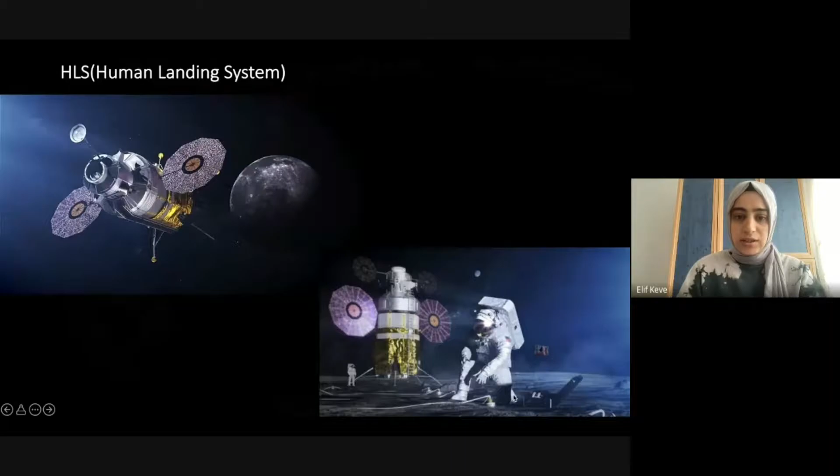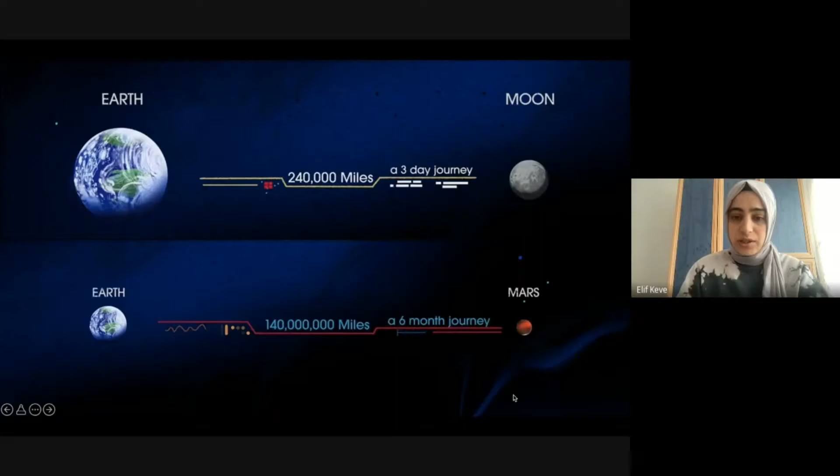We talked about all the details regarding Moon and Mars, the problems and the solutions, and the solutions which can be made by space architects, as well as the technologies which will carry us to the Moon and Mars. I will give more details after this about Mars. I want to recall the distance again, because it's crucial to realize how serious the mission to Mars is, which takes a long journey.

The technology I will talk about, made for Mars, is MOXIE. For that, I first want to show the differences between the atmosphere of Mars and Earth. As you see here, we can see methane gases which are available on both Mars and Earth, but the percentage is extremely different.

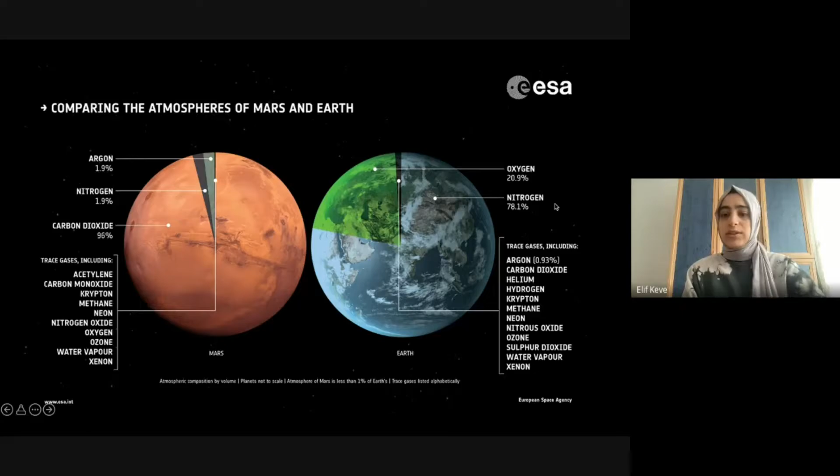As you can see, on Earth we don't have fully oxygen - the high percentage is nitrogen, and oxygen is only 20%. Carbon dioxide on Earth is among the trace gases, and there are also a lot of different trace gases included in the breath we are taking.

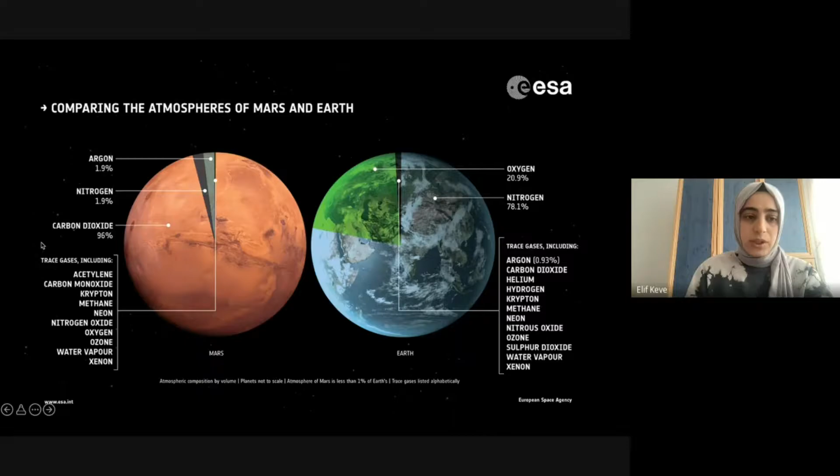When we look at Mars, the highest percentage is carbon dioxide, and there is also nitrogen, but in a smaller proportion. Argon is very similar to Earth. So the MOXIE project is about converting the carbon dioxide percentage to oxygen.

You know about the Perseverance rover that was sent to Mars in 2020 and landed in 2021. It traveled to Mars to investigate the ground with all the materials and research about the deep of the planet, to research the existing ice and water.

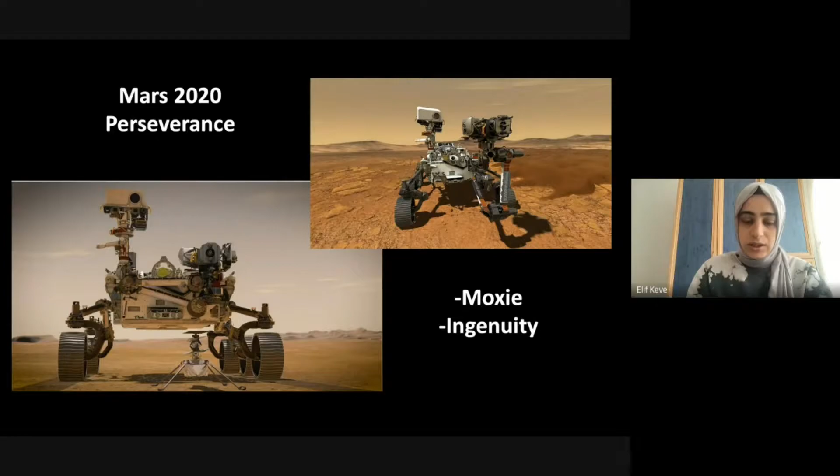With this rover, there are two important parts. One is Ingenuity, which is the first flight on Mars, and the second is MOXIE that we will talk about now. MOXIE is the one that will work like a tree on Mars, but at this first landing with MOXIE and Ingenuity, the MOXIE size is extremely small, because it's kind of a test of this machine, to see if it works or not. So what is MOXIE actually?

MOXIE is an abbreviation of Mars Oxygen ISRU Experiment. ISRU is In Situ Resource Utilization. So it's made from these words, and in dictionary description it means the ability to face difficulty with spirit and courage. MOXIE is a short, snappy name for a tool that helps lead to a human footprint on Mars. It helps humans explore Mars by making oxygen. It works in situ, in place on the red planet, and is an experiment.

The project owner is Michael Hecht, and he says that human exploration of Mars will be a seminal event for the next generation, the same way the moon landing mission was for his generation. They also think about the benefit of MOXIE, as whenever the first NASA astronauts arrive on Mars, they will likely have MIT to thank for the oxygen they breathe and for the oxygen needed to burn rocket fuel that will launch them back home to Earth.

So as we can see, MOXIE is not only for producing oxygen for humans to breathe, but it's also a crucial point that will help rocket fuel to be burned to come back to Earth, because as you know, rockets will not be able to burn without oxygen.

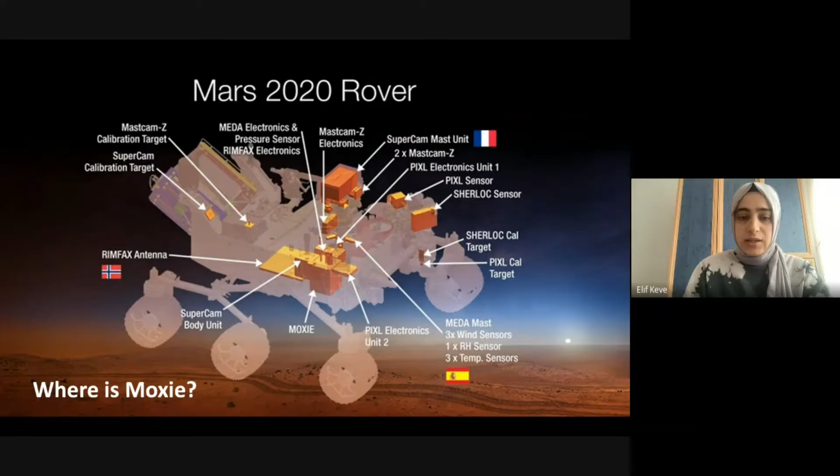When we check the pieces inside the Perseverance rover, where is MOXIE placed in it? All the pieces are actually not designed by only one country, but it's a multi-country effort, as you can see with the flags here showing what each worked on. We can see here that MOXIE is in the middle of the rover. I want to open up the detail of the mission and how it works, what kind of parts are included in it.

What are other duties of MOXIE? MOXIE is the smallest scale actually for now. It will be designed bigger for the next missions, and it will make more benefit on Mars. It is ingesting carbon dioxide from the atmosphere and producing propellant-grade oxygen. MOXIE will make 6-10 grams of oxygen per hour, like a smallish tree, or about 50% of what you breathe.

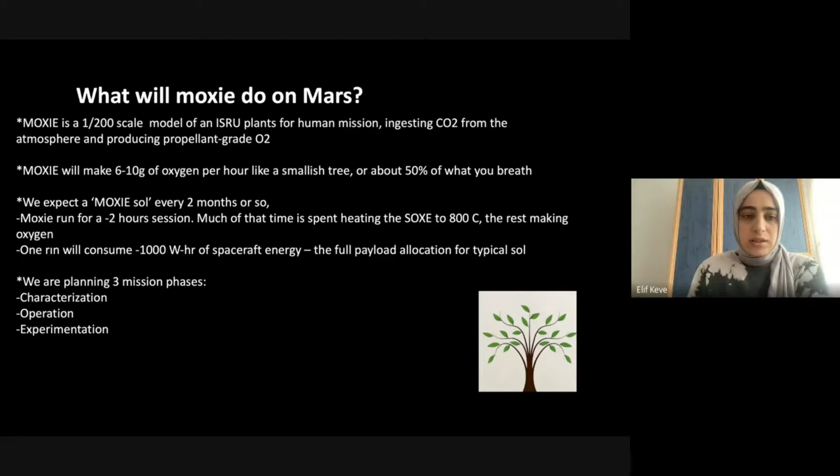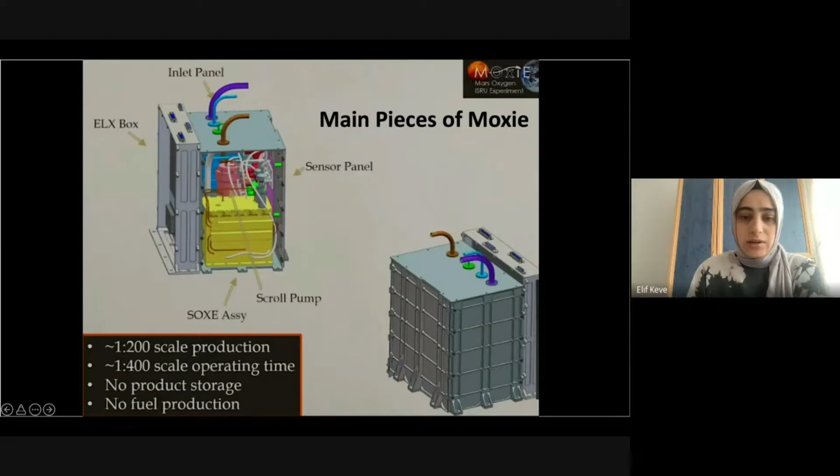When we look into this machine, there are two very important parts that I will give detail about: SOXE and the scroll pump, located in the sensor panel. As you can see here, this yellow box is SOXE, which is the entirety of it. And the pinkish color here is the scroll pump that is taking air from outside to inside for changing it.

At the exterior view, it is placed inside with two inputs for the outcome, and this part is taking in the breath, the air inside. The scroll pump is placed here, and they are placed next to each other.

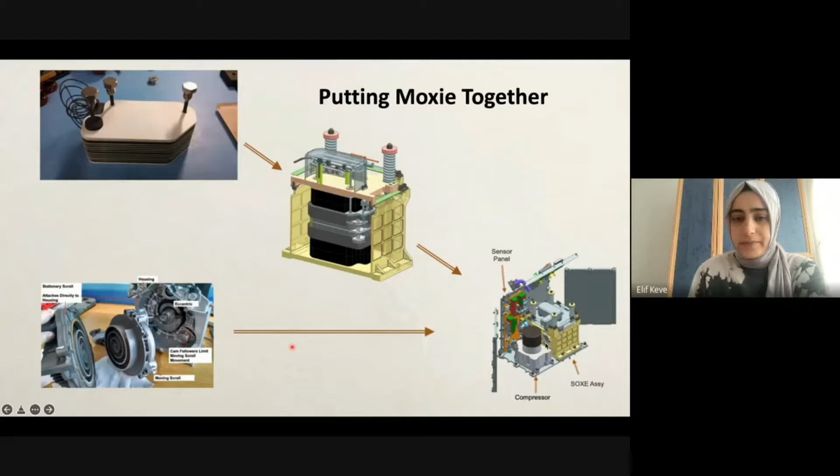From this chart, maybe it's easier to understand how it works inside with the chemical descriptions. This is the scroll pump, placed next to the SOXE, and it's sucking air from outside and taking it inside to send to the SOXE. The actual work happens in the SOXE.

It works with the same system that we learn from chemistry. It has two different sides, the cathode and anode, to divide the minus and plus molecules. As you can see here, there are three pipes which take in the air, dividing it with this system, and taking out the oxygen and carbon monoxide and carbon dioxide.

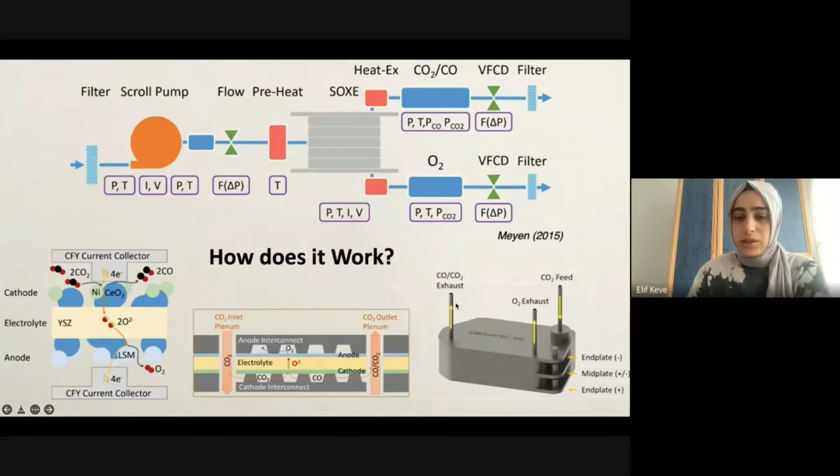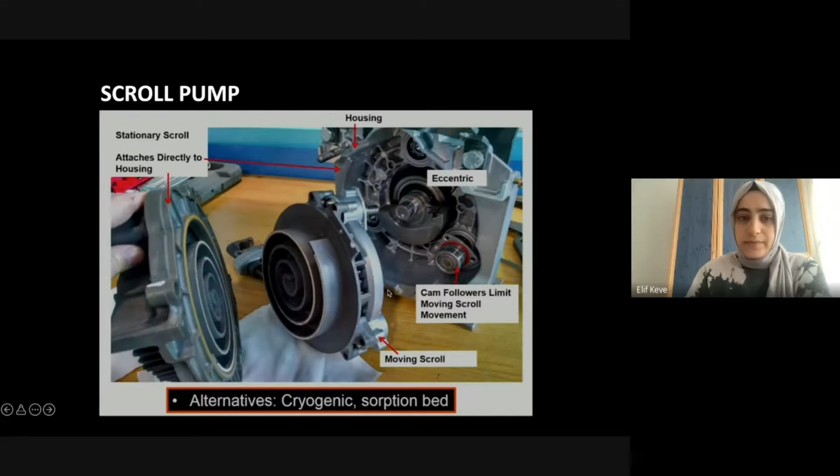Maybe this is the simplest way to show how it works. So how does SOXE take the air in? There is a housing part here holding this, and a part that moves, a moving scroll, to take the air inside. This is the simplest way the carbon dioxide in the air is taken inside to be divided into carbon monoxide and oxygen.

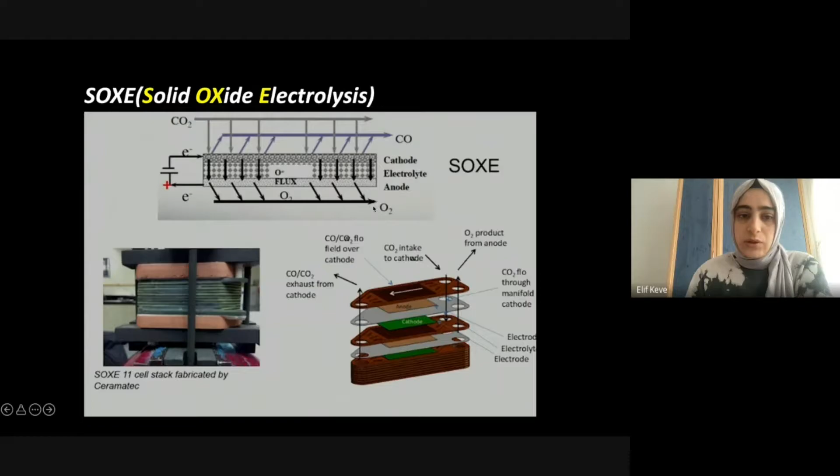And the simplest reaction is shown here. However, if it works like this, the benefit is usually half, because of the chemical reaction. When you take carbon dioxide, it will produce half the benefit in oxygen, unfortunately.

The next project is the same project, but the size of it is extremely different scaled. So the benefit given by the Mars 2020 project will be a kind of demo of the real size of the MOXIE. With this new scaled MOXIE, we are going to get more benefit, like a small forest rather than a tree.

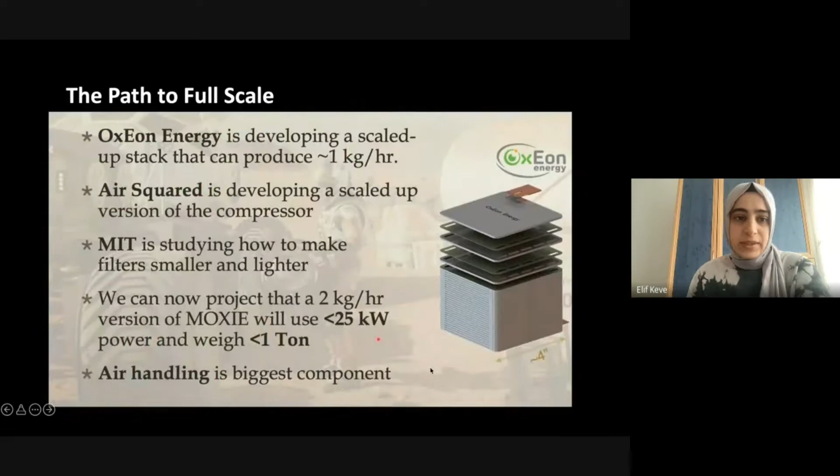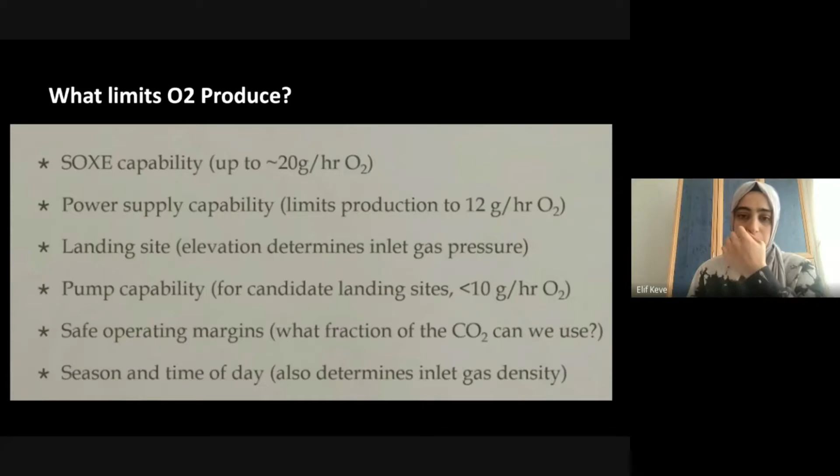There are some limits to oxygen production, because it's not possible to use all the energy of the machine fully for oxygen production. There are also inner piece capabilities. SOXE capability is up to 20 grams per hour it can produce oxygen.

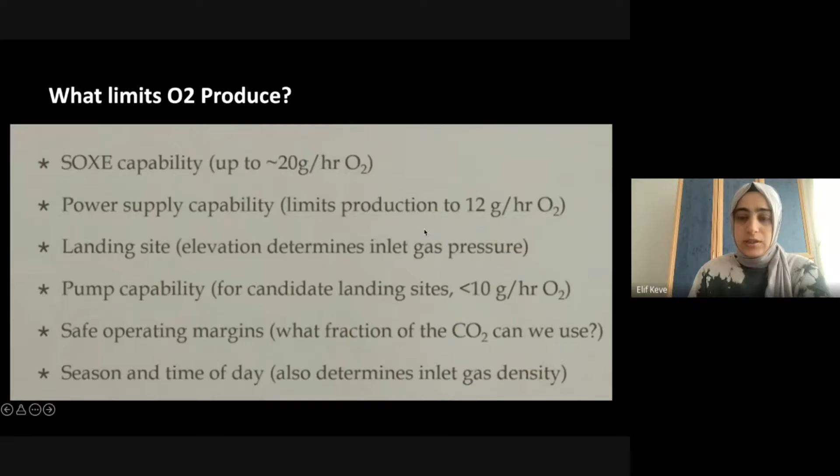Power supply capability is also one of the different factors inside. And here it explains the differences in time, because the machine works differently in the summer nights and summer mornings, according to different seasons or temperatures.

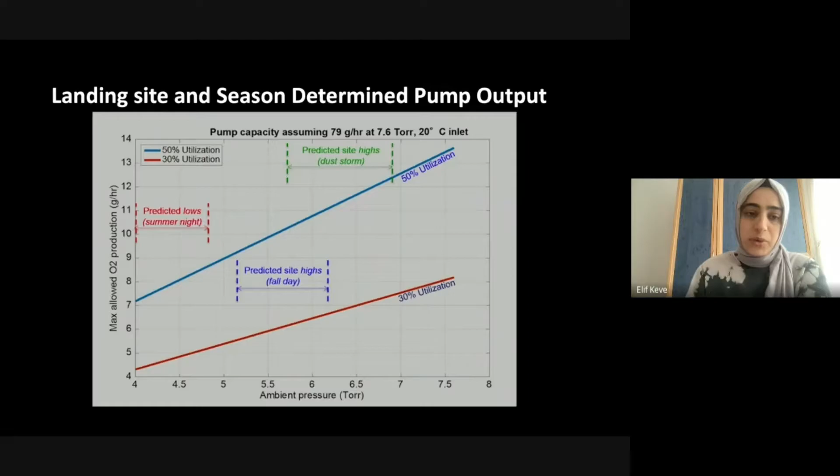As I said, all the energy produced by the machine is not fully used for producing oxygen. It loses a lot of power for the machine's own workings, and the highest one is the stack heaters, which take 72, and electronics conversion is 67, and SOXE also uses high power, and the pump as well.

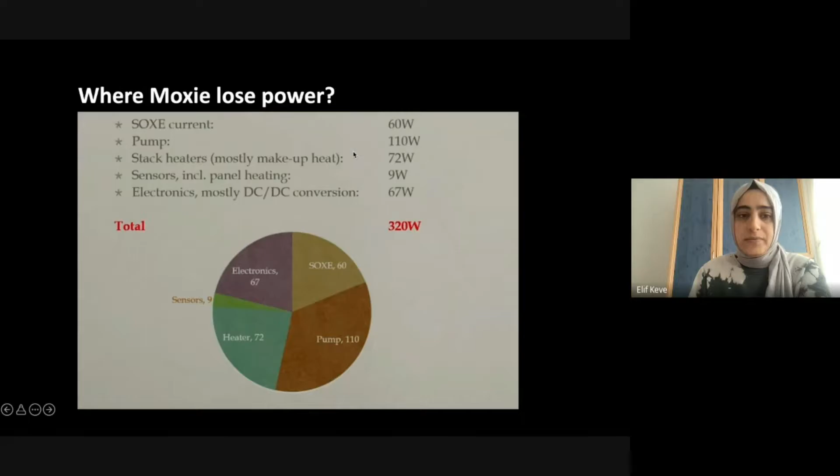I would like to give some examples of space architecture projects after this. So we are learning how we will go to the moon first with the Artemis project, to make the first and highest analog area to simulate life in outer space. Then after Artemis 2, we will land on Mars, and what we have to solve is oxygen, to return and to breathe.

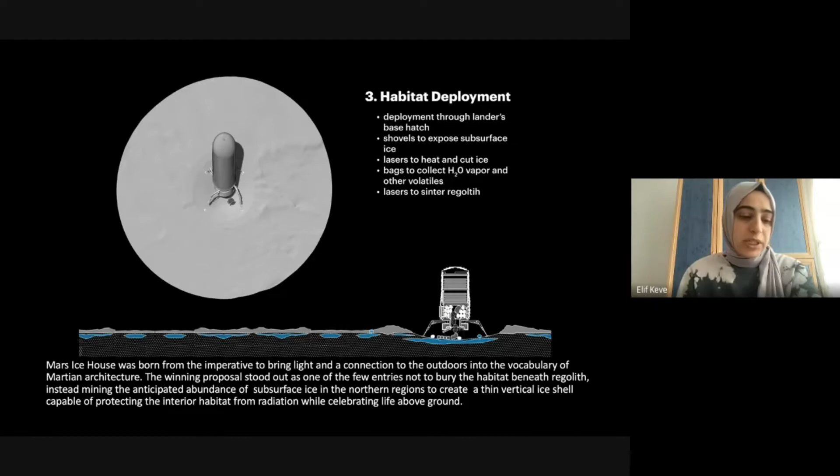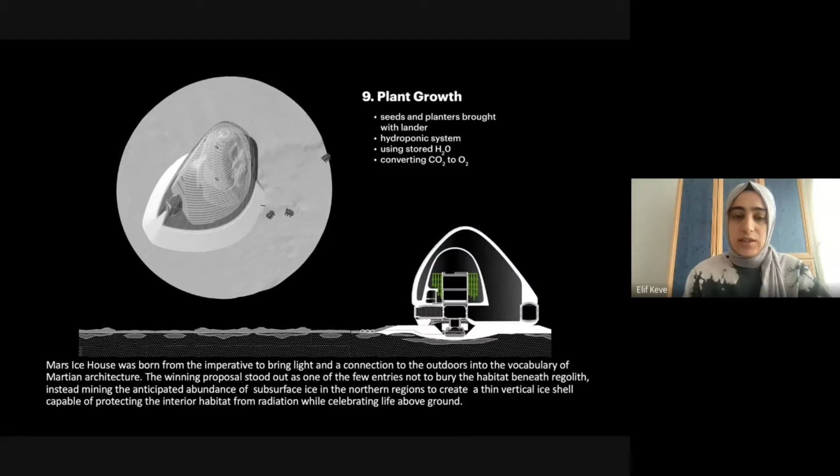As you can see in this small demo and animation, first there will be a descent and landing to the ground, and the habitat will be deployed. Then, as for the shell, the exterior shell and interior shell are made of ice and ETFE translucent material, and it should find...

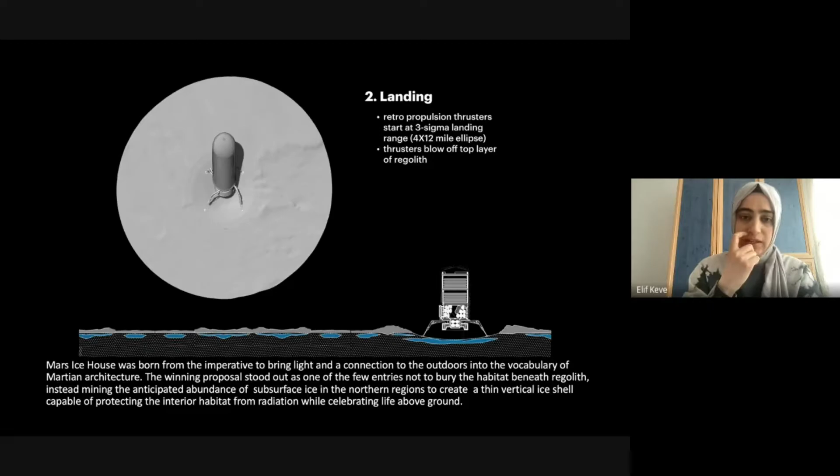...the H2O, which is water, ice, under the ground. There are different machines working on the construction of this building. One of them is very important for finding ice and water underground. I will give more details about these machine robots, how they work and what they do.

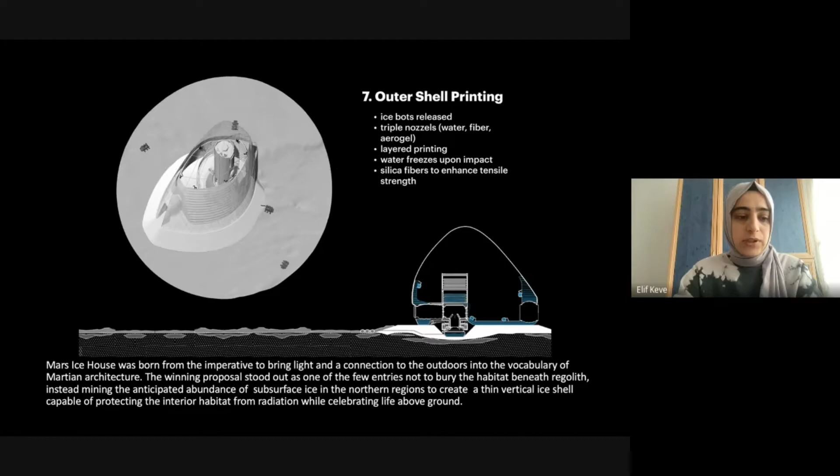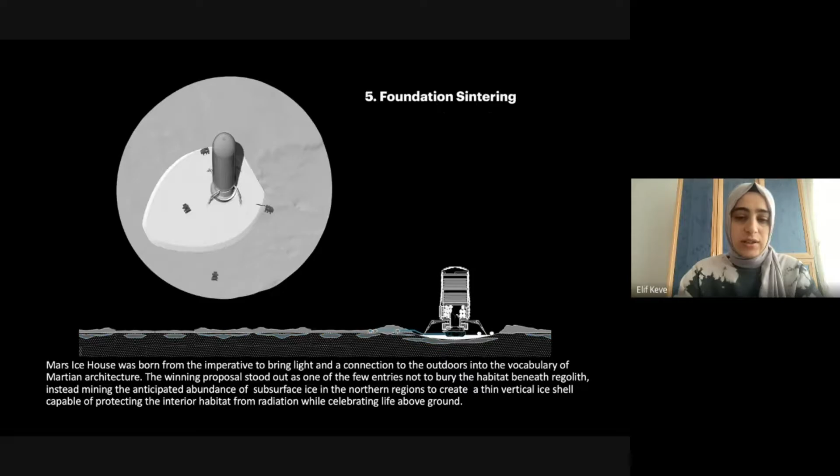Finally, after having the source of ice and water, the foundation will be sintered, and ETFE membranes will be inflated. The second important robot is for printing the shell, both the outer shell and inner shell.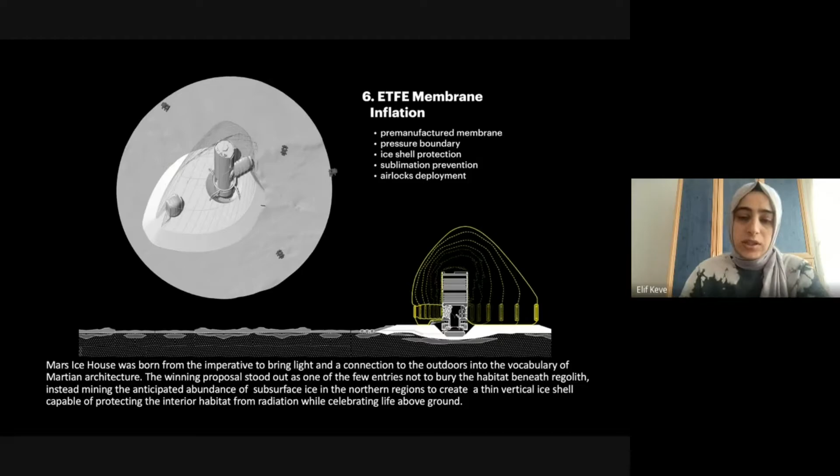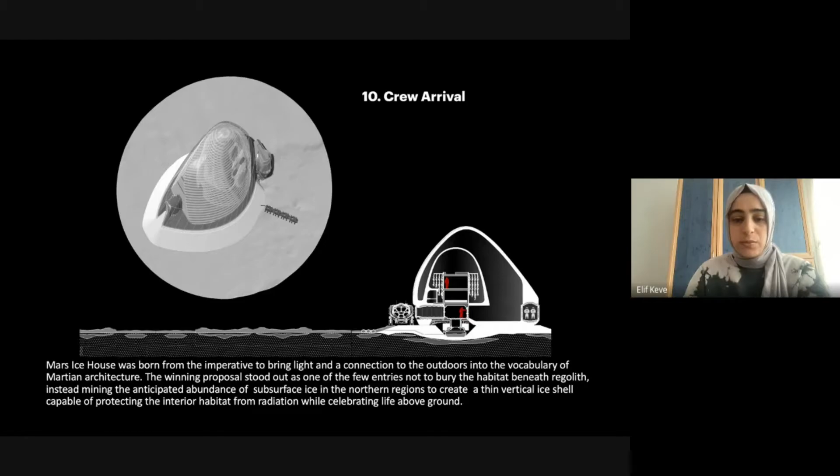I also want to make a last point here. The concept of this project comes from bringing fresh light from outside to inside - that's why the material is translucent, partially transparent, to let sunlight inside. The machine robotics I talked about are these two very important ones, WaSiBo and iBo.

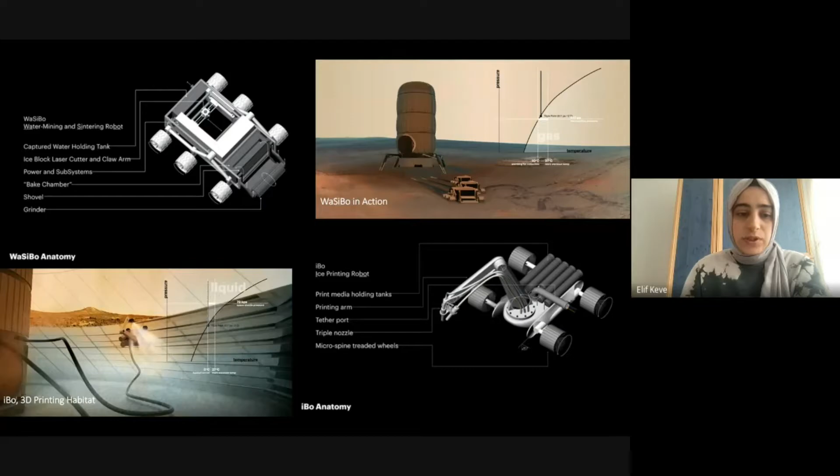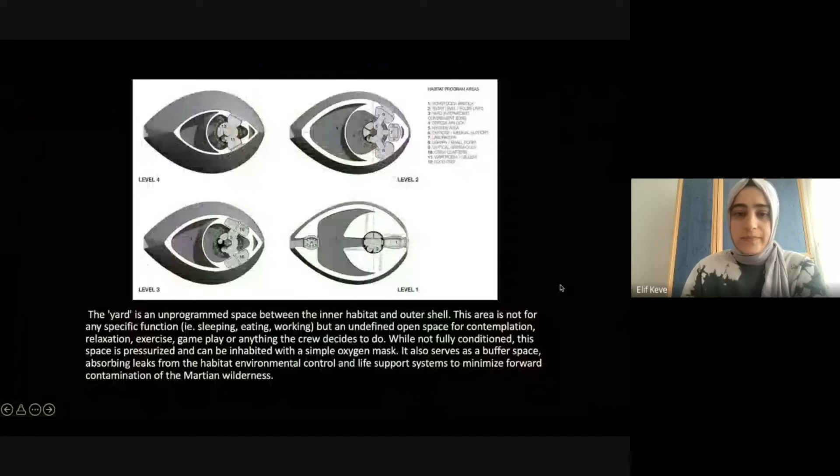WaSiBo is the machine that will research the places with water and ice to be used in the construction of this first habitat. iBo is the 3D printing machine used for the exterior and interior. Here you can see better how it works, climbing and 3D printing for the interior and exterior, because this project is double shielded.

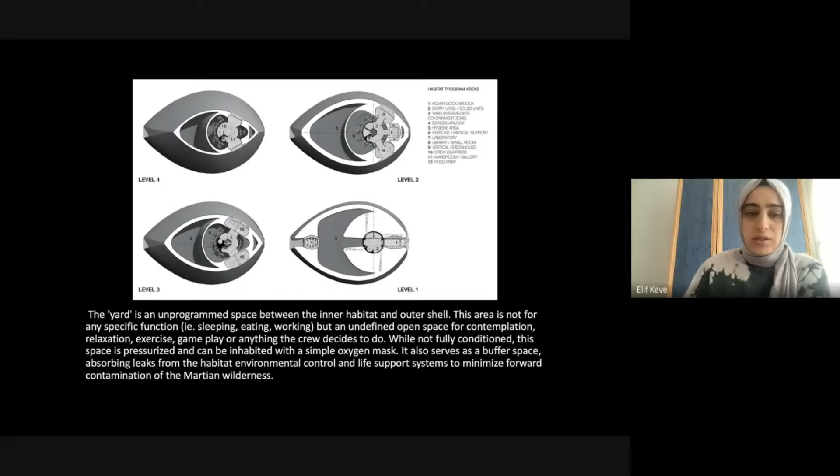Because of having this double shield, the exterior part, the yard, is partially protected, but the interior part is extremely protected from all the hazards, radiation, and other things. We can see better detail here how it is.

As you remember from the small animation, the first landing happened here. Some robotic machines come out to research ice and water to use at iBo, 3D printing the exterior and interior shell. Another important point is this part, the airlock.

We have to have airlocks at every project. That is crucial, a very significant point that we have to think about. It will protect humans when passing from outside to inside.

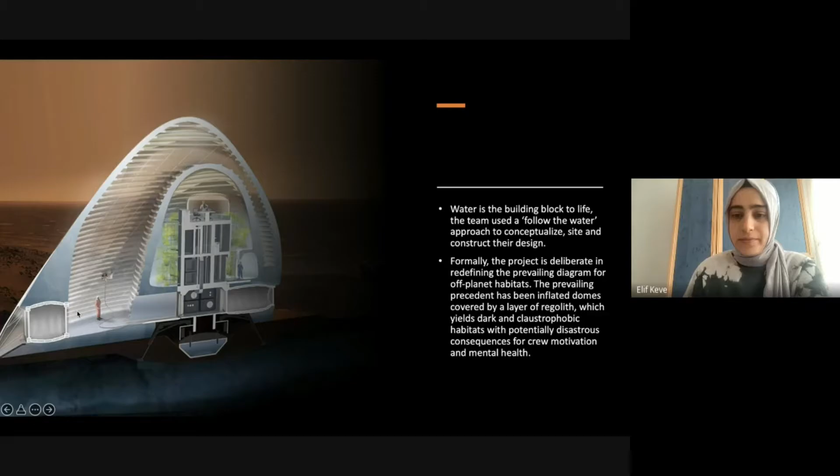The second important project of the search group is Mars X House. Mars X House has two different versions, version 1 and version 2. First I want to talk about version 1, then version 2. This is one of the prize winners of NASA's, belonging to Phase 3 Habitat Challenge.

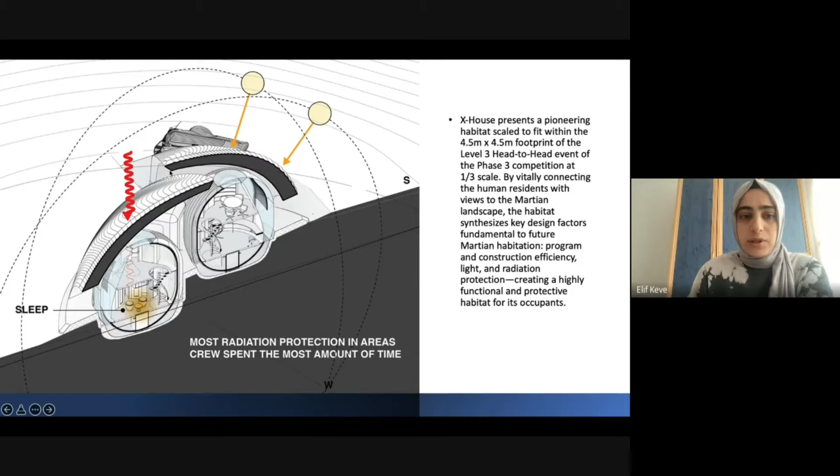In this project, there are also two different parts actually connected to each other. The concept is about how to take in horizontal lights, but not direct lights, because direct vertical sun rays are very dangerous for humans. That's why they made small openings at this part to take horizontal light inside.

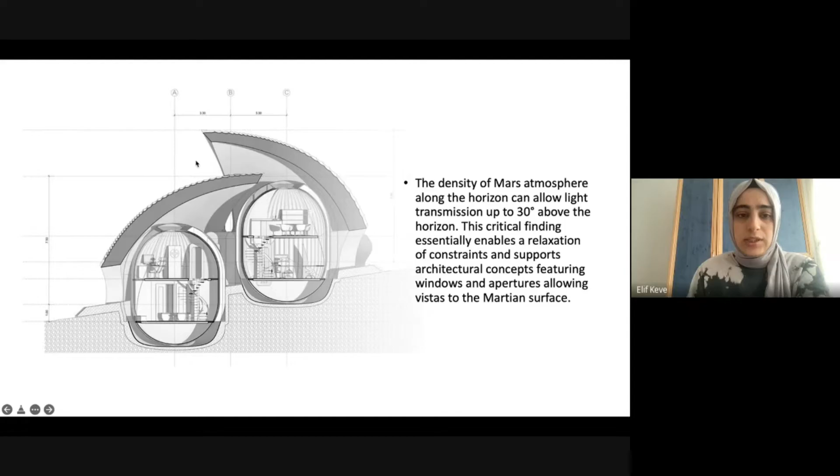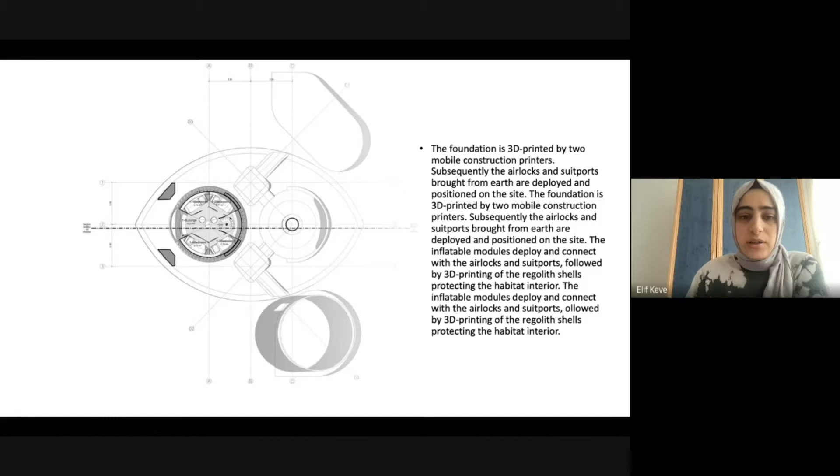They made this opening by creating two parts with two levels, so in this case they can cover both with horizontal light coming inside. As you can see here, how the two parts are connected to each other, with all needed parts.

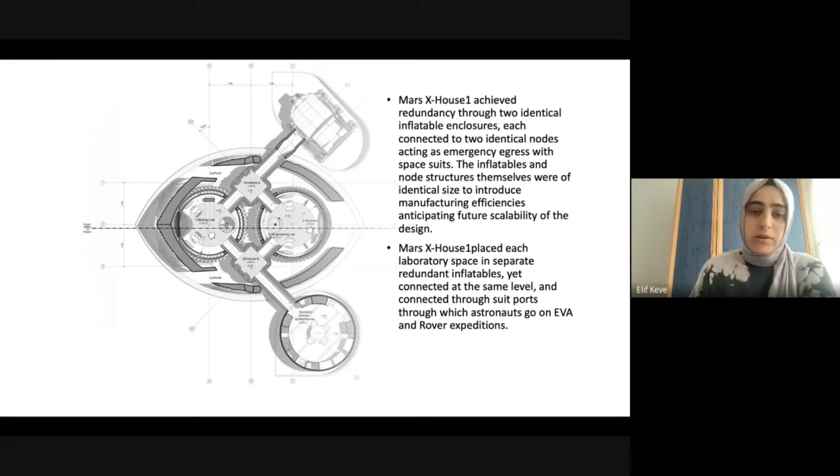Looking at the plans of the Mars or Moon projects, there are some small differences from life on Earth. They are extremely focused on how to live in small spaces and make them larger through multi-use and flexible usage. They also care about a gym and sport area, and each house has its own plant growth part to make a sustainable living.

Version 2 is also named Mars X House. It is one of the first prizes of NASA Phase 3 again, the 3D printing habitat competition in 2018 and 2019.

In this project as well, as I said, before humans arrive, all the robotics will construct this building. With this shape, they are mostly focused on protecting from the exterior winds and forces outside, because Mars has high winds that can damage structures.

Yesterday one of our friends asked how high we can go. I will explain a little more about this question at the next project, but here they are also trying to make the highest construction. Here, making it curved, as I said, makes it resistant to exterior forces, and all the loads are included in this part.

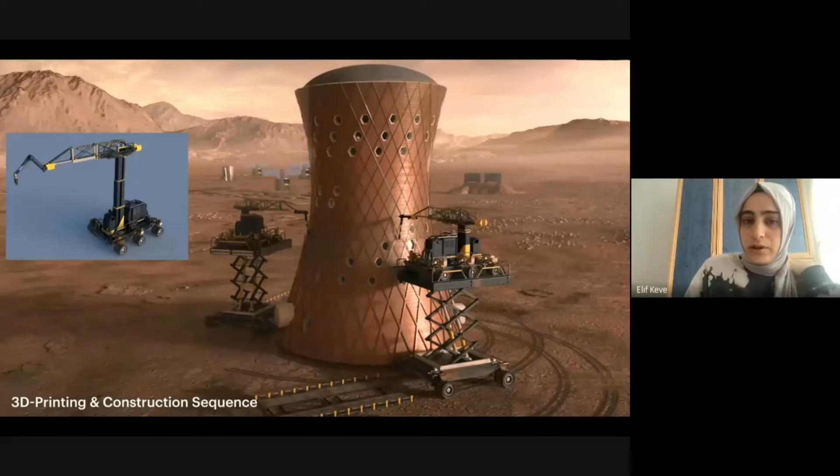The nice part here is the openings, which take biomimicry from the bee cells of honeycombs. It's a perfect shape - the hexagonal shape is one of the perfect shapes that can make the biggest surface with the lowest edges.

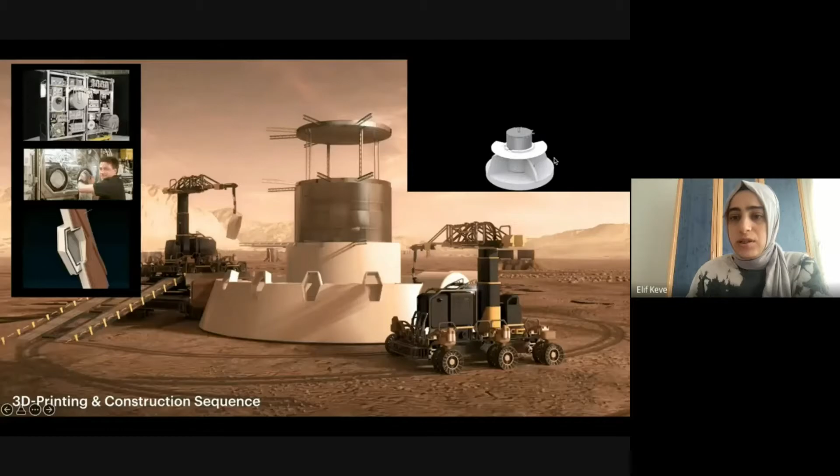You can see a small animation of how the levels are constructed, what the steps are. First, after the foundation is constructed, construction parts will be placed, and 3D printing machines will print the rooms, divisions, and levels. After seeing the interior construction, you can see the outside details here.

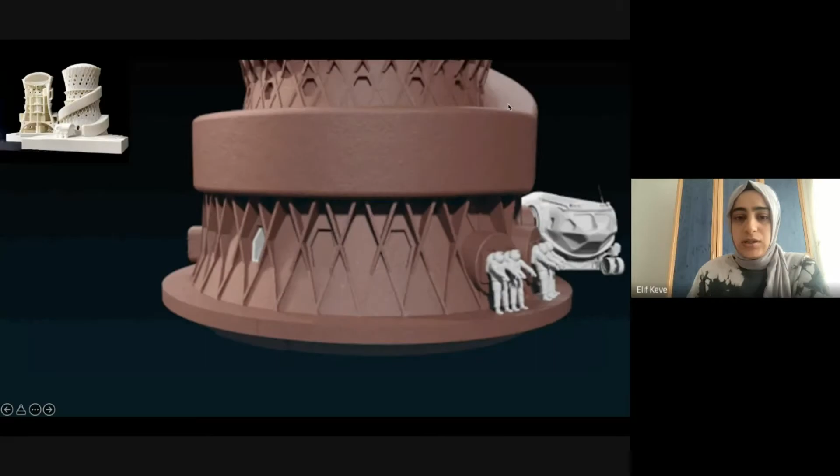As you can see, they have different levels from the exterior to interior. Regolith concrete covers the exterior, but the regolith, the material of Mars, is toxic material. It's not very healthy for humans to touch this ground - it contains toxic material for human skin. That's why they usually cover it with different interior shells.

Also, for making it strong, basalt fiber is used - double shelled inside to protect humans from the toxic regolith concrete. The base is made of HDPE material. Finally, the window is a piece of assembly used with a hexagon super shape.

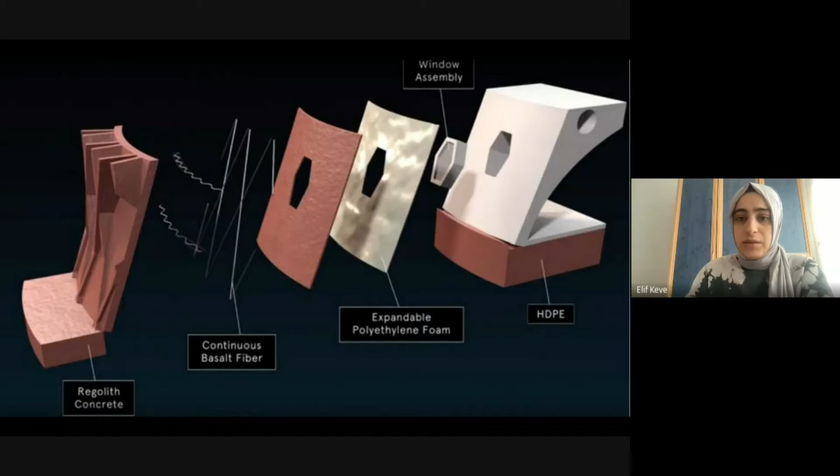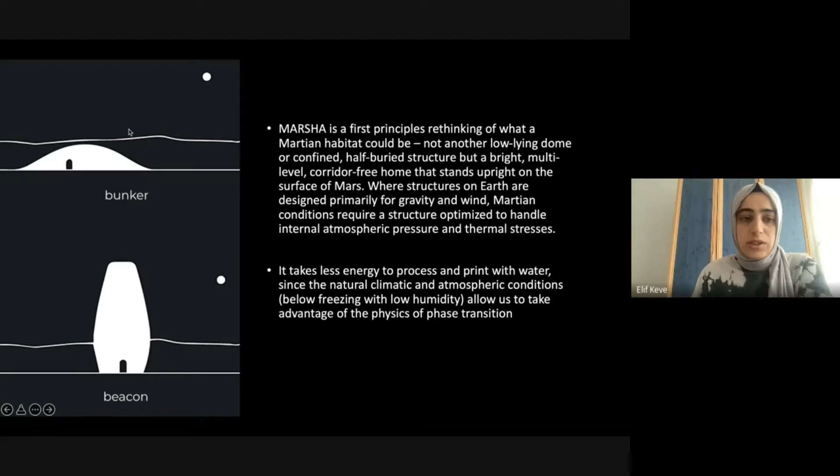Marsha, that is the project I wanted to talk about. The concept is the answer to our friend's question from yesterday about how we can make the living habitable area higher than the normal concept, which is always small domes to protect from radiation underground. These were the initial projects, however this new concept came up against that first concept.

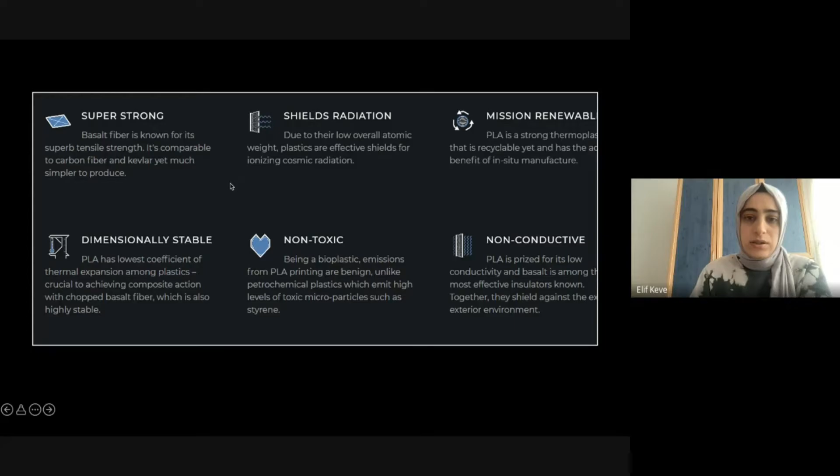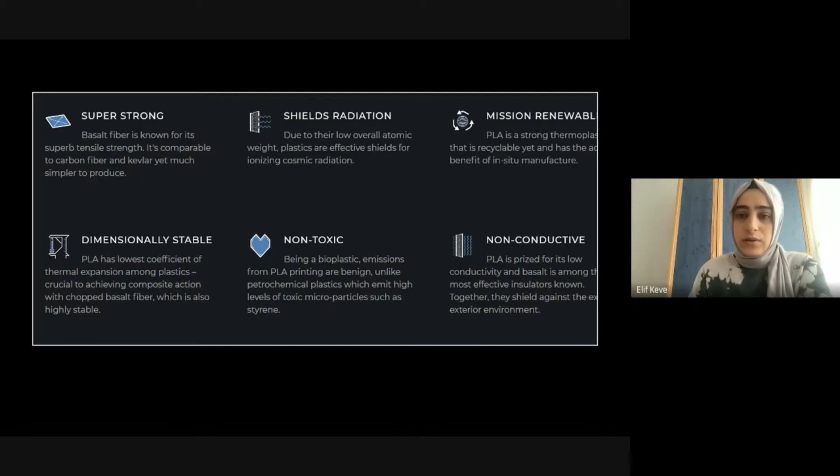This structure, this building, has very important features. It's super strong and has radiation shielding. It's also double shielded, double coverage. In any case, we have to protect humans from the toxic regolith of Mars. And it is renewable, and as seen here, no toxic material is included.

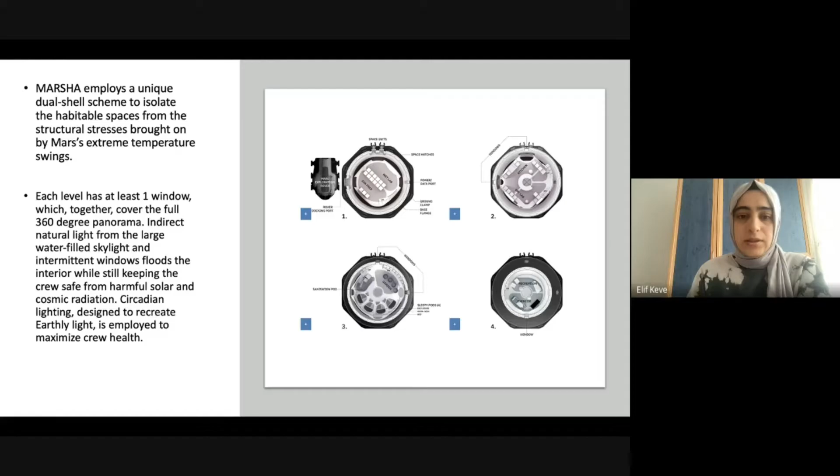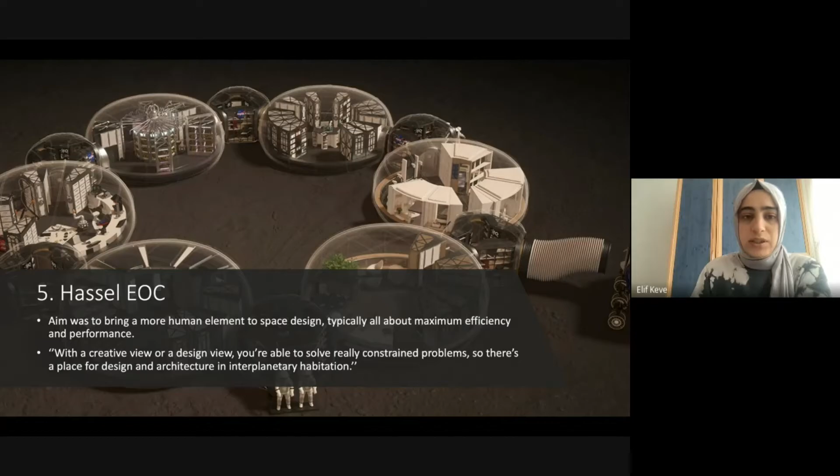The last project will be about Hassel Studio's project, EOC. It includes two parts in the construction: 3D printing for the exterior, and the inside will be inflatable parts. This is the exterior shell with the 3D printing. With this part, even if there's no connection beyond this, it can be completely protected from the exterior regolith.

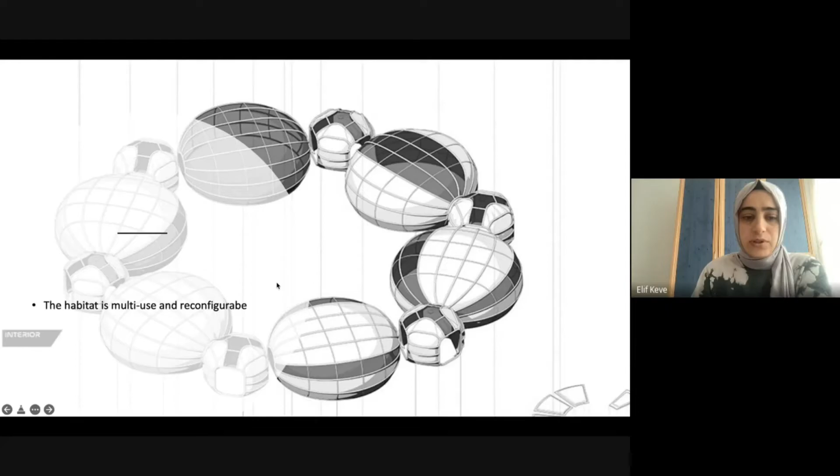This part is the inflatable part. It has all connections with each other and is designed for all needed parts, and how it can be inflated and connected, inflated inside underground under the regolith. We can see that all the pieces are serving different needs. As I said, at all the habitats we have to have a research area and a green part to produce our food by ourselves to make sustainable life.

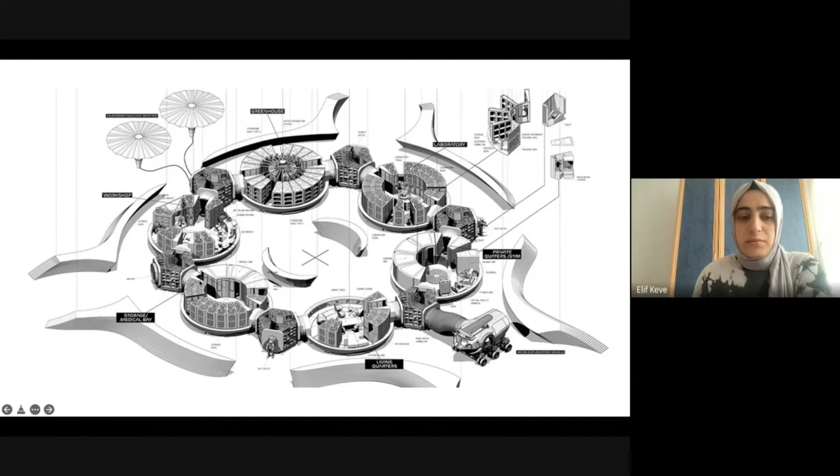They include different parts like a workshop, which will be very useful for future long stays. I can mention the medical part, greenhouse, laboratory, and living area are very important and crucial points we have to account for in all the projects. Also all the systems should work eco-friendly and sustainable, producing its own energy from the sun.